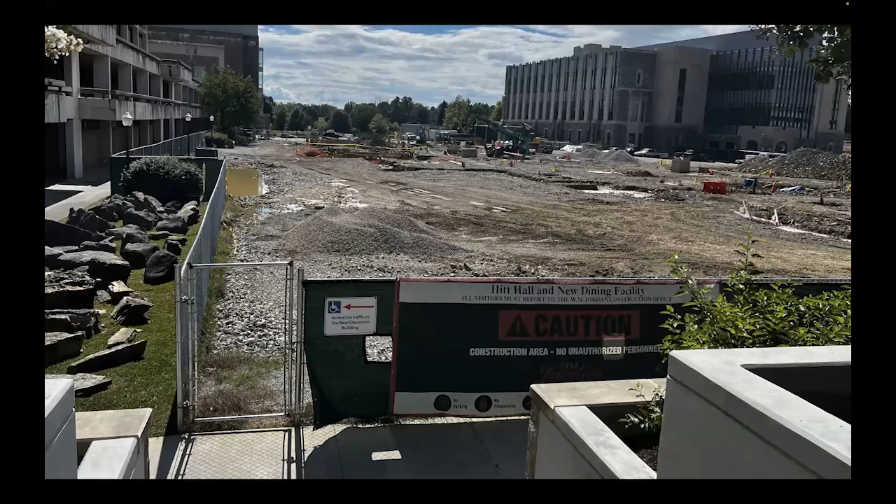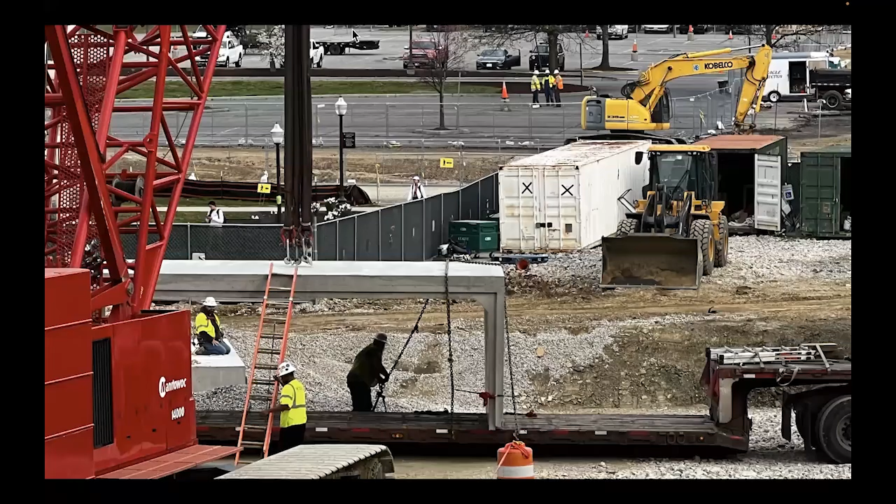This is the site down at ground level, and you just see a lot of gravel. And one thing that's going to come into play is there's a lot of gravel because it's super useful for all kinds of things we'll talk about, and it's also super cheap, especially where I live in the mountains where there's quarries everywhere. All right, and here's some more construction, and here's that box culvert. The one that's a football field long.

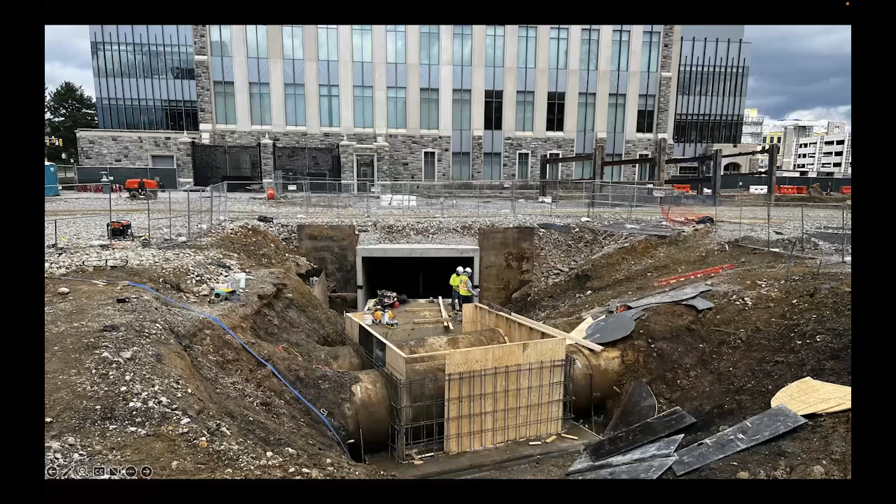And so they of course redirect the stream temporarily at first, and then they put the box culvert down, and then they redirect the stream back to where it wants to be, or where they intend it to be. I'm not quite sure which, and that's what it looks like. And here's what it looks like inside of it. And there's kind of one of the mouths of it. And again, you see it right here. And it kind of makes a right turn somewhere also. I'm not sure if that's at the beginning or the end. I think it's at the end.

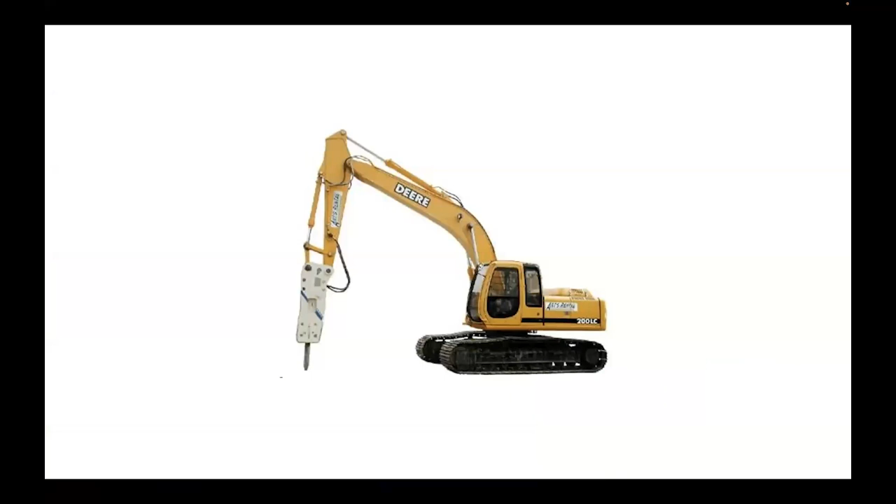Now, there are 3 things that come into play that make a foundation expensive, because the foundation is expensive. For a building of this size, the foundation is maybe 5 to 15% of the cost of the building. And it's an $85 million building. So let's round up to $100 million just to make the math easy, and because it'll probably go over budget.

So you have a $100 million budget, you have a foundation cost of something on the order of $5 million to $15 million. Well, that difference is huge. That's a huge line. The delta of that is overwhelming. And the thing about foundations is as long as you have a competent foundation that doesn't settle and can support the building properly, you don't get extra credit for having an extra good foundation.

It's not like cabinetry, or fixtures like faucets, where there's almost an infinite spectrum and yawning array of different faucets you could put on your sinks, where some are really expensive and those are better generally, or prettier at least, all the way down to your low-end sink. It's not like that with foundations. You don't really get extra credit for having a better foundation once it's good enough, because no one can see it anyway. So there's not generally a reason to have an extra good foundation.

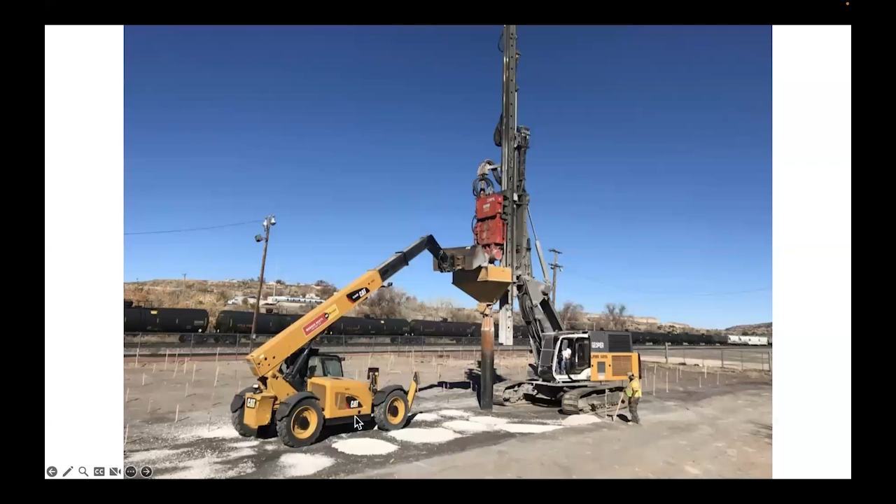What we're going to do is, in 250 different locations around this site, we're going to drill down and then fill it with gravel, which is super cheap, but we're not going to have to drill down that deep. And we're going to ram the gravel down, and it's going to kind of mushroom out at the bottom. If you can see my mouse, each one is going to have kind of a cone around it where the soil can't be disturbed. This is not this site, but that's one of the other things about this type of foundation.

It's hard to get a good picture of it because it actually doesn't usually look this clean at the top, because the gravel from this one kind of blends into the gravel from this one, and maybe blends into some of the gravel they put on top of a geotextile that allows for the equipment to drive in, which is for a different purpose altogether, so the site doesn't get too muddy for the equipment and the delivery trucks.

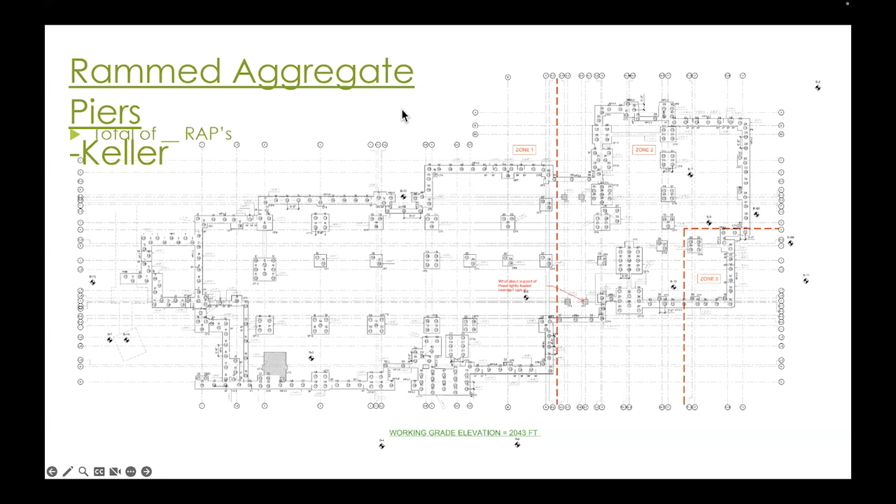But this is the idea that you're gonna drill down, you're gonna fill it with gravel. And then, as you're going to see soon, we're going to rest the building on top of it. So each one of these circles, like here and here and here and here, tell me on the chat if you can't see my cursor. Okay. So each one of these 250 circles is a pier, and I happen to have access to the specs of this.

Since specs are such a big part of so many of these exams, really probably all 6 exams, specs are in play. So let's take a minute and just read this portion of the specs. So this is locating the work. 1.4 verification. The surveyor shall verify that the following elements of the work have been furnished, installed in accordance with the contract documents. Piles and drilled piers. Verify locations, elevations, and dimensions. So that's a big one, right? You got to make sure it's in the right spot.

I saw a presentation long before it was completed on the Richard Meier church of the year 2000, the Jubilee Church in Rome. It was off by 3 degrees, which is a lot on a big site like that. So there was, I'm sure, a lot of hand wringing. I'm not quite sure what happened, but it all worked out for Richard.

Anyhow, submit certification to the owner with a copy to the architect in the form of original drawing signed by the surveyor. So that's a deliverable, a submittal that the contractor has to do, stating that the work has been accurately located relative to property line. And in general, chapter 0 and chapter 1 have all those kind of miscellaneous things like that. Like just make sure you surveyed it right, and make sure that your construction trailer has night lighting outside of it and has a railing, whatever.

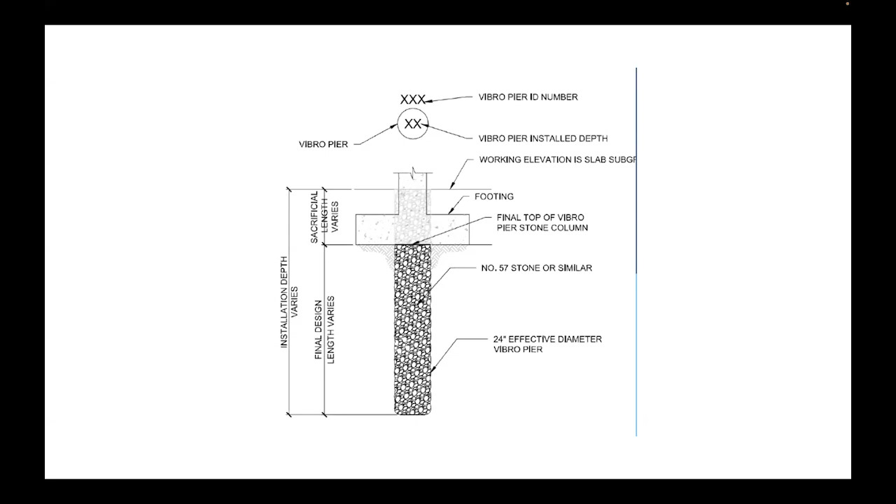And so here's one of the drawings of the footer of what it's going to look like. There's going to be a spread footing, which is going to bear on the pier. This is a rammed aggregate pier. Then on top of the spread footing there's a concrete foundation, either wall or column, that's then going to have a piece of steel on top of it.

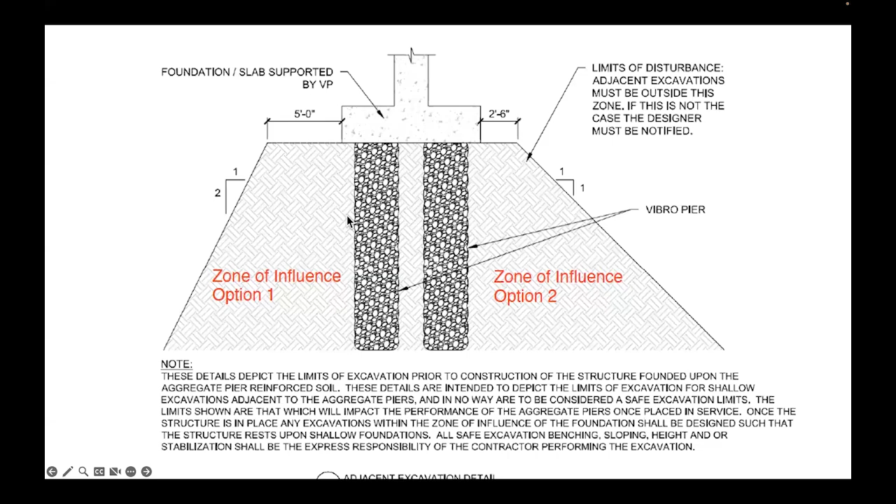And it's not always the case, but with these particular aggregates, it's often the case. These particular aggregates use some Portland cement as a little bit of a binder, so that things act a little bit more like an underground caisson, but just a little bit of binder to keep the whole thing together. And I think this is that underneath here. In fact, I'm almost certain it is.

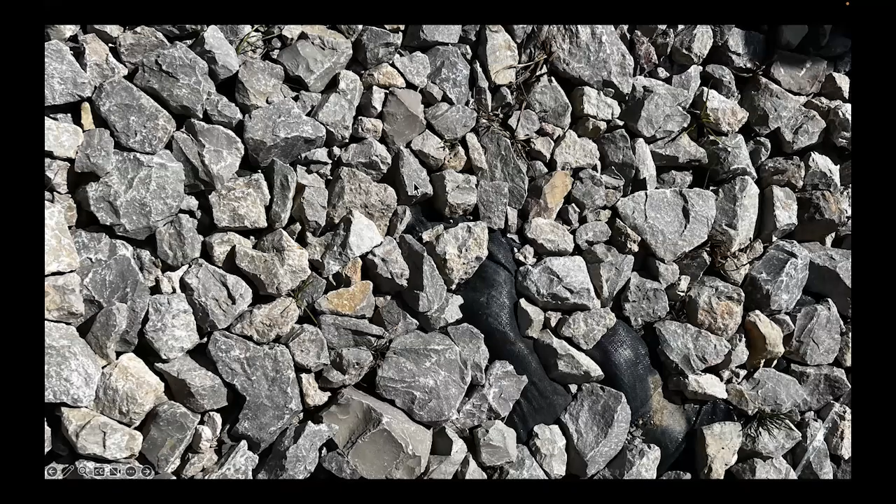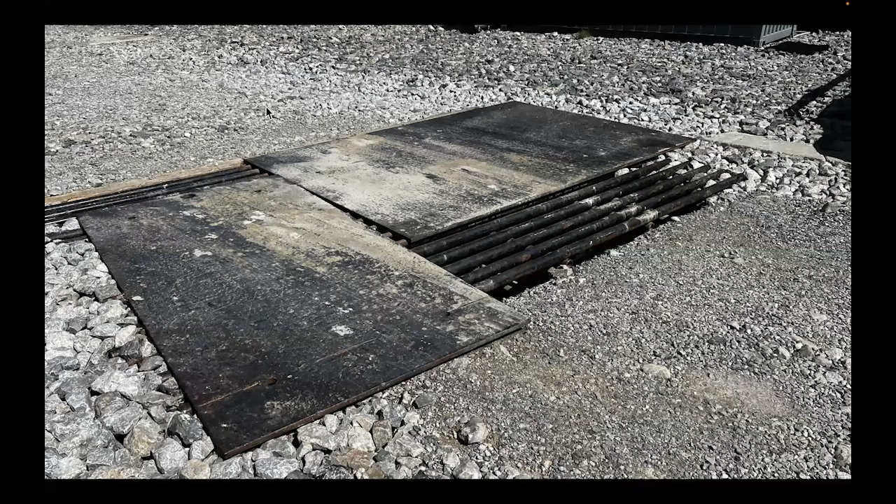And so gravel, as I mentioned, especially where I live in the mountains, they literally just take it from the quarry right next door kind of thing. And they'll just put it down. And you can see underneath of it, right here, there's a geotextile. And so they'll put that, in this case, this is gravel that they're putting because they have to bring trucks continually.

I mean, if you ever see a construction site this big, and this one's not the biggest by any means, but if you see a construction site on a $100 million project, you will see a lot of construction trucks coming all the time. And so they have ways of doing all kinds of things. One is making it so that these big construction delivery trucks and cranes don't get stuck in the mud. So they just put gravel down.

Now, I'll share with you there was another construction site we used to visit the year before this one. I take my students at Virginia Tech to visit these every month, and the one before was where they were always putting more gravel down, like every month. It was always a mess. And this one, they didn't really seem to have to, even though this one was at least as wet as the other one, because there's an underground box culvert in both cases. They both were actually the same part of the same underground stream, even though they're about 3/4 of a mile from one another.

And now that I think about it, I asked them what they did differently on this one where they didn't need that. And they put the geotextile much wider than the area that they wanted to drive on. And they think that's what actually helped a lot, because it was the same construction company in both cases.

Anyhow, go ahead and put in the chat what you think these grates do, these steel bars over a pit. See if you know what those do. Yeah, you got it right, Junior. They clean tires. So if there is mud on the tires, some of the mud can be taken off either naturally or maybe they hose it off. I'm not sure. It's almost like a welcome mat, but it's more for leaving. They don't want the mud leaving because it makes the roads messy, and campuses like the roads to be clean. And also because we all like our topsoil to stay where it belongs. And no one wants their truck to be messy.

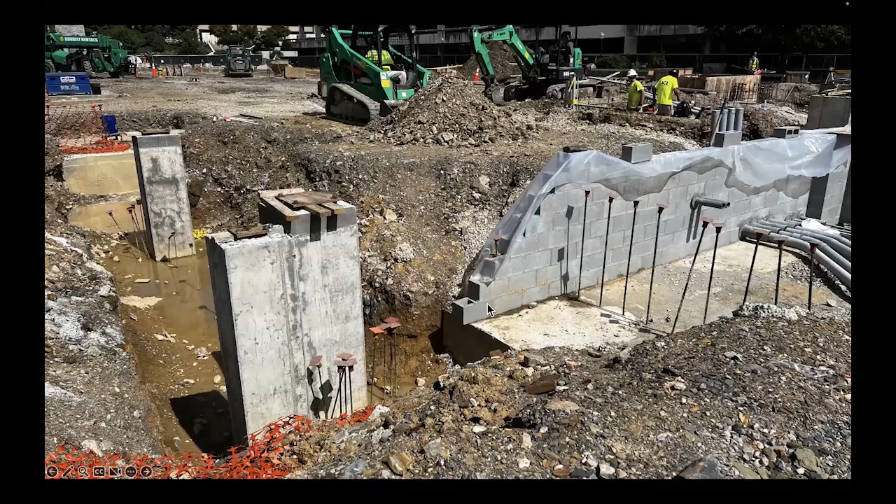So in this case, you see the footer, and then there's a block wall being built on top of it. Over here, there are columns that are resting on a footer that are again on top of the aggregate piers. Now, why can't we just put the steel on top of the aggregate piers? Think about that for a second. There's two reasons we can't. One is, how would we attach it? It's just a bunch of gravel, so how would you attach it in a permanent way? And secondly, we don't put steel underground. Generally, concrete and gravel can be underground, but this is a steel structured building.

So from bottom to top, it goes rammed aggregate, and then on top of that is the concrete columns or stem walls, and on top of that is the steel structure. Again, you see more of these coming out, and start to pay attention to these. Those are plywood right now that are putting the leveling bolts in the right places. You see it here and here, and you see this line connecting them. So they're making sure everything is at the right height because they're going to be bringing the steel in not too long.

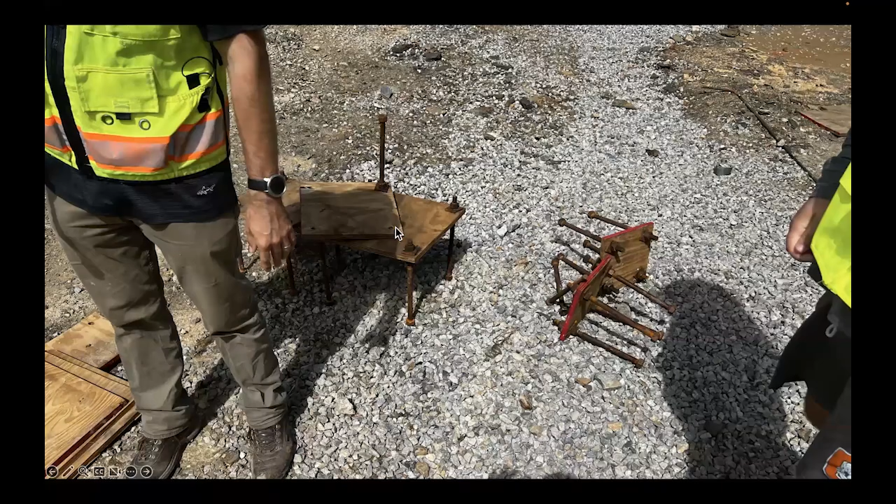That's what these look like. So if you ever wondered how they get the bolts, the threaded rod with the nuts, at the right place, this is how they do it. They put either a J bolt down below, which looks like a J, so it can grip onto the concrete in the concrete column that's coming out of the ground on top of the footer. In this case, they just have a threaded rod with a bolt down here at the bottom and a bolt up here at the top.

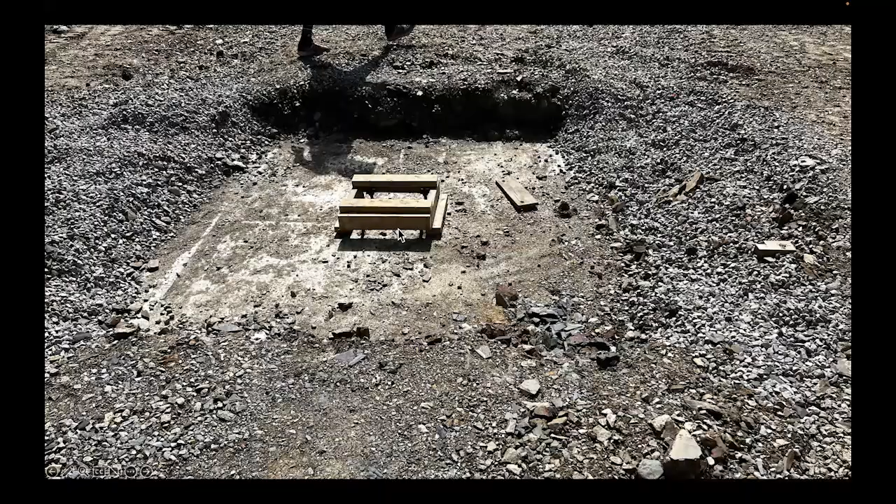And again, they have this piece of plywood that's there temporarily just to kind of hold it in place. And then when they're pouring the concrete for the column, they'll cast it into the concrete element. And usually there'll be something like 2 inches. What they'll do is they'll pick one of the bolts and make it exactly at the right height. You saw them with the surveyor and the level string, making sure that was going to happen correctly and everything

was plumb and aligned. And then later when they put the steel on, they'll use those 4 bolts and they'll tighten them. They'll turn it a quarter turn or a half a turn or 2 turns clockwise or counterclockwise because they want to get the steel plumb. They want to have it vertical. And of course, concrete is not that perfect that you can have 3 stories of steel exactly vertical just by casting it in. We need to be able to use these bolts to account for tolerances and fudging a little bit once you're on the site.

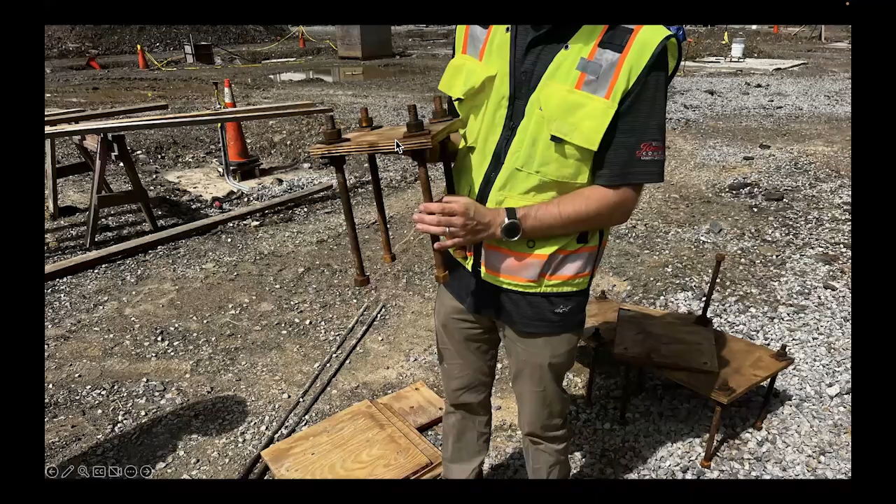But for some reason, we're always surprised by how long the foundation takes and how long the finishes take. And we're always surprised, even as architects. I understand why lay people would be, but as architects, we're like, man, what is taking that building so long to get out of the ground? And then we're like, man, that building came up so quick when you see the superstructure, whether it be wood or steel. And then we're like, man, that building's taken forever to finish. But it happens every time, and it seems to get us every time.

And that'll cover it up, make sure nothing gets in there later, and make sure things don't rust. So it'll cover up the bolts in that space between the concrete foundation columns and the base plate of the steel columns that go on top of them. So there's going to be all the steel in the end, and actually there winds up being a lot more steel, as I mentioned.

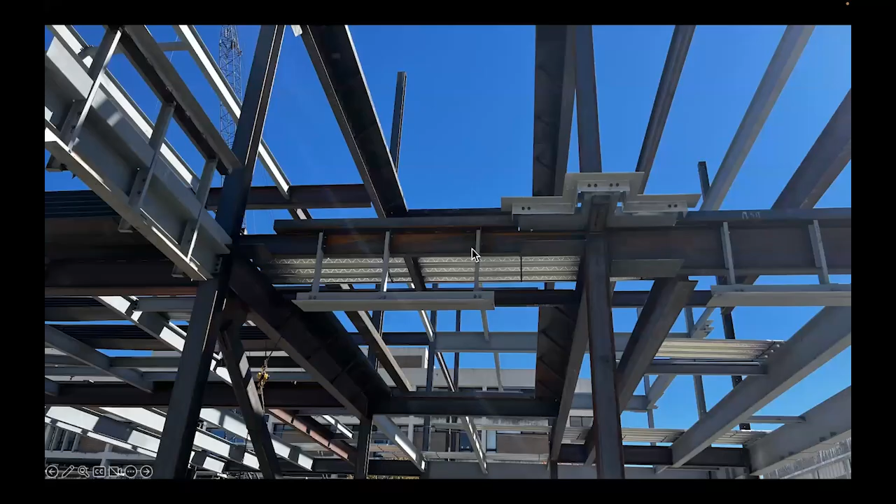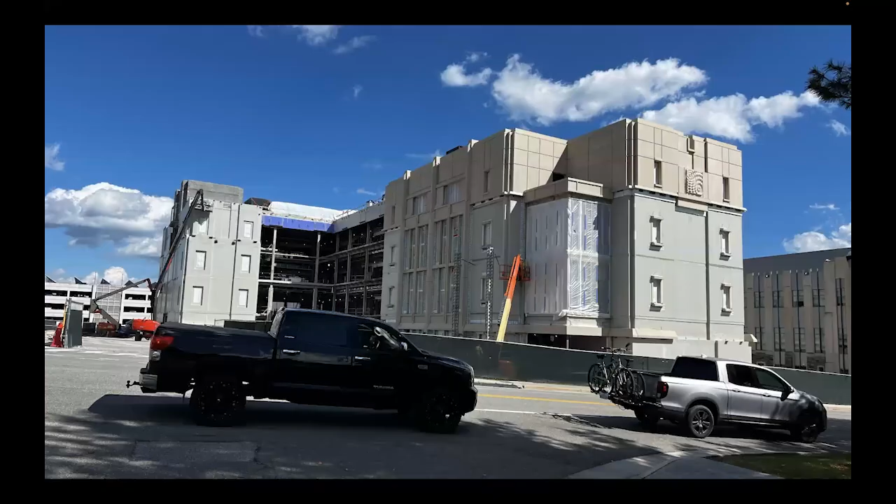And you see all the waterproofing on top of it. You see the precast concrete that's attached to those steel elements. And the whole thing is really just attached to the steel. So there's going to be stone outboard of that. But even though the stone looks like it's going to the ground and being supported by the ground, in reality, at least a huge portion of the stone after a certain height is being supported by these columns that are on top of these rammed aggregate piers. And again, you see it here and here.

And so this is kind of a section detail. And it looks like there's precast concrete coming down. You see the air drainage gap, the air plane for the cavity wall. You see the exterior insulation. And somewhere back here is the steel column that's actually holding all this stuff up.

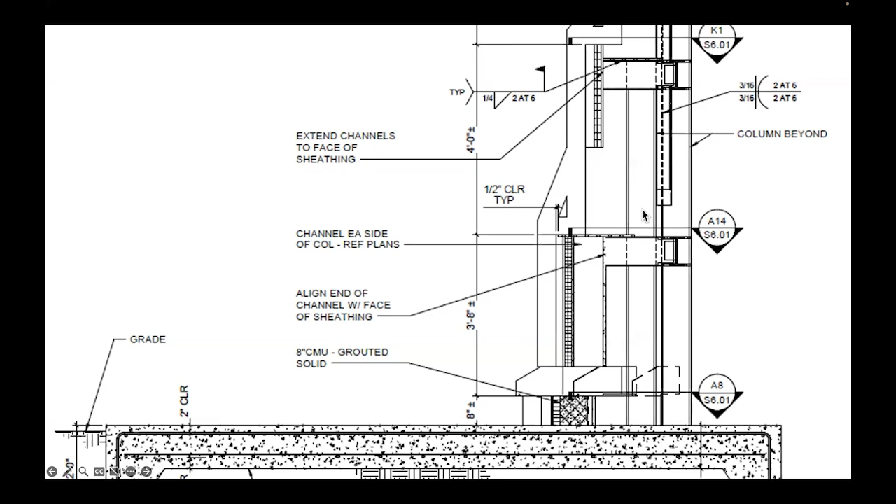The conduit that's coming in, as I mentioned, has to not only avoid the zone, the cone of shame around the rammed aggregate piers, but also, and I bring it up because this is very much in play for a lot of the exams: the owner is the university, the contractor is the general contractor. The owner has his own consultant doing AV. So all the audiovisual cabling and stuff is being done by the owner's own consultant.

I guess the thought is that the owner wants some kind of consistency in its AV systems, so that it can know what's there, it can keep track of it, it can make it upgradable as it needs to. It would be a shame if every classroom had a completely different system, where the technicians would have to watch YouTube videos to figure out how to connect one piece of AV equipment to another. So the owner has their own

subcontractor. Now, when that happens, and it's not uncommon, especially in specialty situations like AV on a $1.5 billion a year campus like this, it's not unusual for the owner to have some of their own subcontractors that they prefer to deal with. And those subcontractors are paid for by the owner, but they're coordinated by the general contractor.

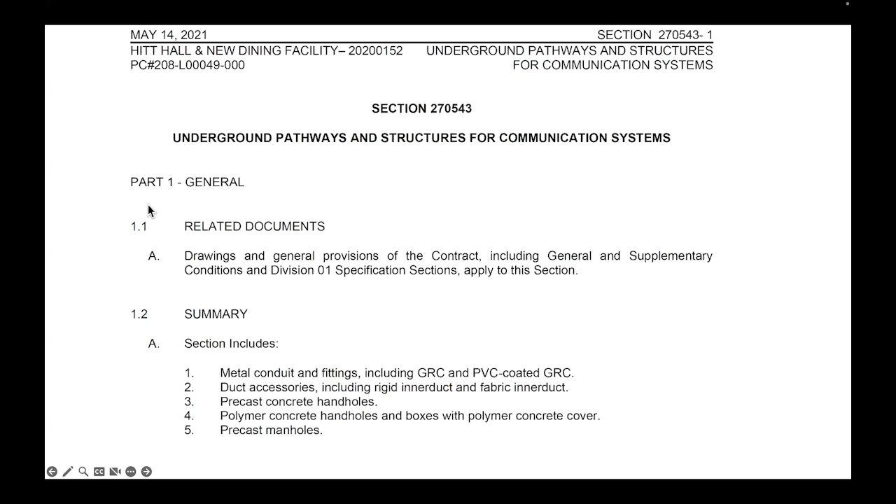So this is the underground pathways and structures for communication. So this is the AV. Section includes metal conduit and fittings. So there's kind of a summary of what the section includes, precast manholes and so forth. There are definitions for what some of these things are. So somewhere else it talks about GRC, and now you can see what that means: galvanized rigid conduit.

And of course, with MasterSpec, they're always in the same place because you want the AV consultant that the university hires not to have to look through all 2,000 pages of the spec document. You want that particular group of people who are doing the AV to know that they are going to section 27053, 270543, because that's where it is.

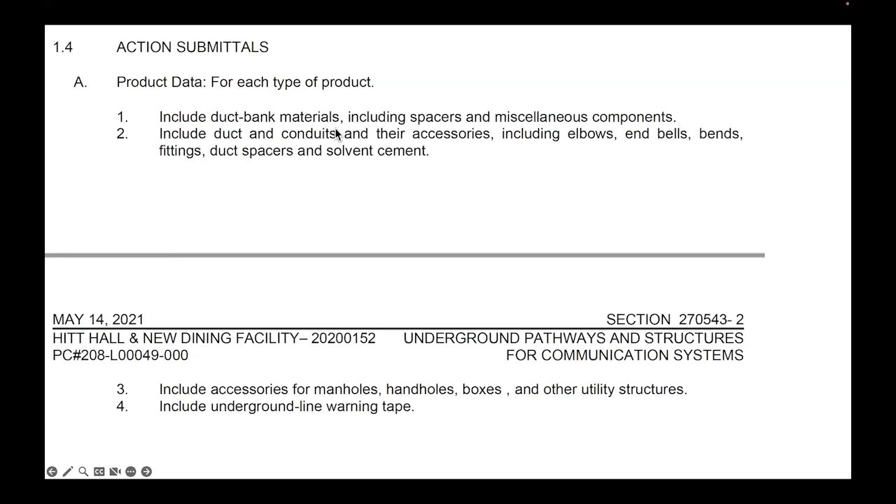But anyhow, include duct bank materials, including spacers, just has kind of all the rules, precast or factory fabricated, fabric, so forth, include duct entry provisions.

Some of you guys deal with specs all the time. This is not very interesting to you. Some of the younger people who are in this group probably don't deal with specs as much. Actually, some of the older managerial types might not either. It's kind of a mid-career type thing.

But anyhow, metal conduits and fittings, and here's that GRC that I talked about. And then there'll be performance-based specs. So listed and labeled as defined in NFPA 70, comply with TIA 569-C. So these are different kinds of things that will have the general requirements for the metal conduit.

So, I'm making this up, but it'll say, underground ones shall have a rust-proof coating that meets a standard of whatever grams of nickel per linear foot of pipe or whatever. Or it'll say it shall have no more friction than whatever, or it'll say that steel pipe shall be no less than a quarter-inch thickness in the shell of the pipe itself.

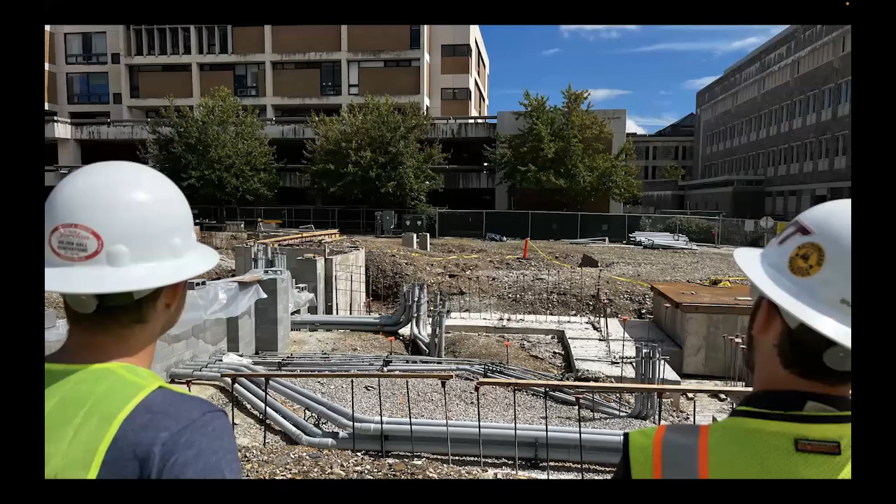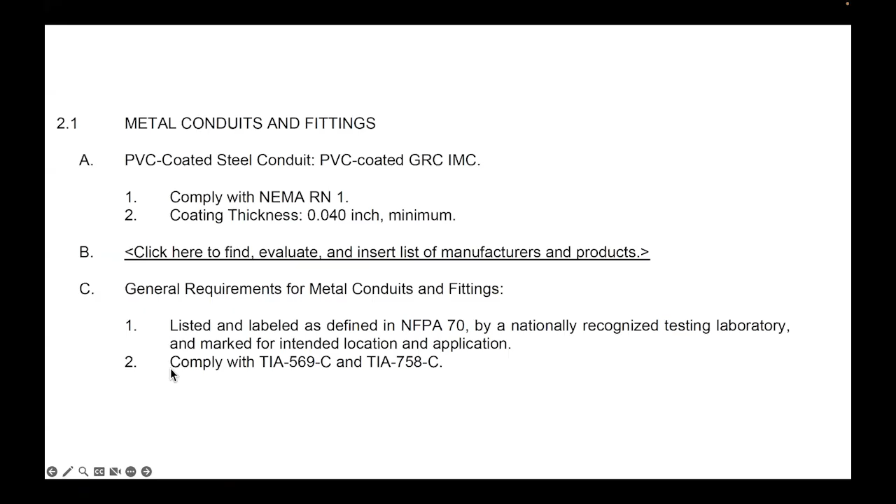But anyhow, those things are going to have to go into the building. This particular building, they went in a bit sloppier than some others I've seen. And actually, a little bit later, we came back to visit, and they were waterproofing around these, which is difficult to do, as you might imagine, because this is a great place for water to leak in as they penetrate the foundation. Anyhow, there's more of this and more of this.

So going back to the original question where we're asking about foundations and how this works. So we have spread footings, which maybe can handle it in this example. It depends on the soil, the width, a whole bunch of things. So there's no such thing as incompetent soil. There's incompetent soil relative to the weight of the building. If you're putting a shed on it, the soil might be perfectly competent. But if you're putting a bigger building on that same soil, it may not be sufficiently strong.

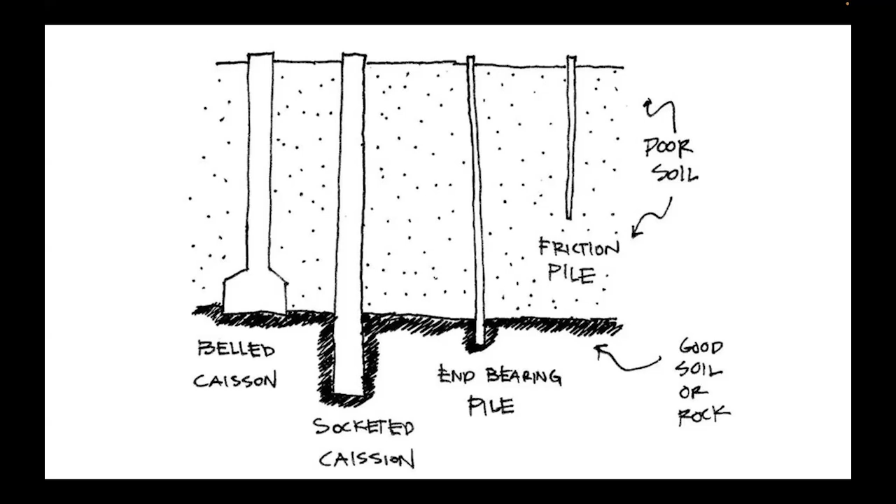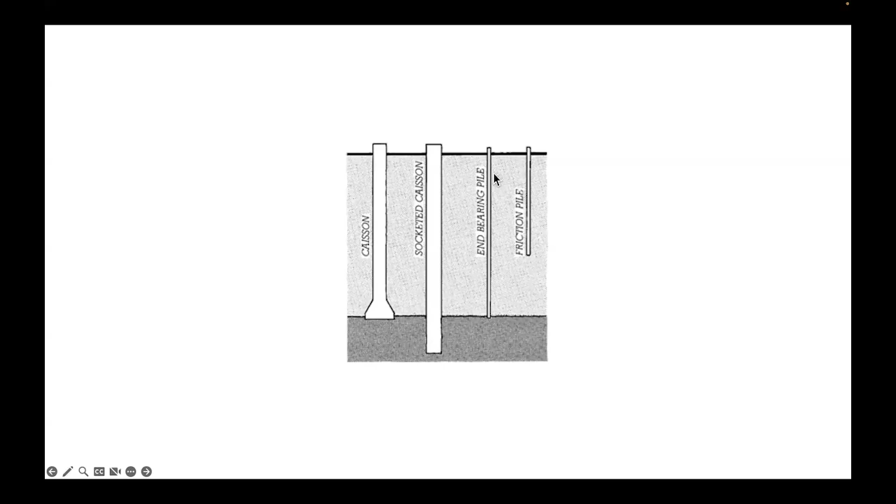And generally, that's the same principle as if you stuck a straw in the sand. There's enough friction that it can hold some weight. And if you stuck a shovel in the sand or something like that, it could hold some more, and so forth. This is from Fundamentals of Building Construction, I think. But anyhow, it's the belled caisson, the socketed caisson, the end-bearing pile, and the friction pile.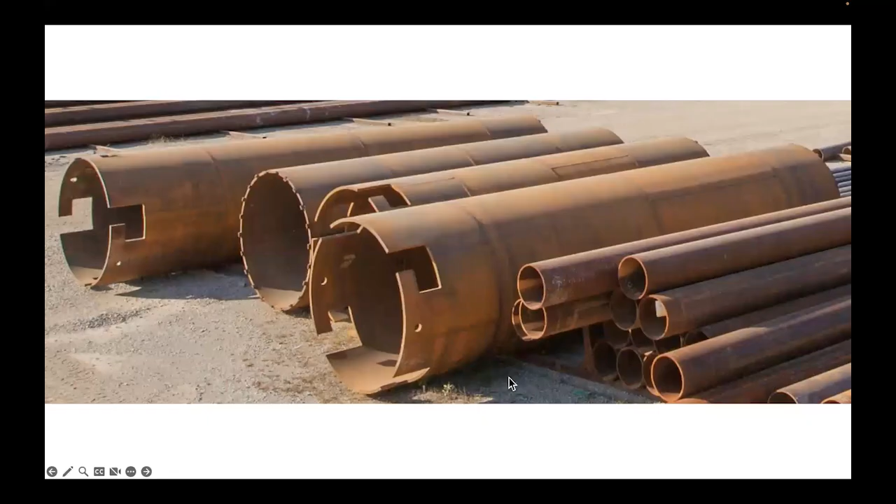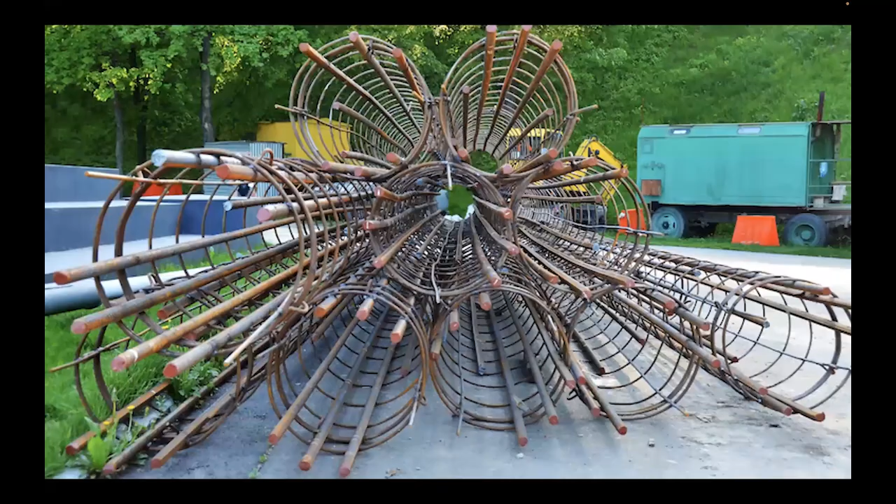And so here's what the caissons look like. They have these big kind of things that they drill down in, and they'll start drilling in. These are the bits, and they kind of attach one to the other. I don't think they leave the metal in. I'm pretty sure they take it out and reuse it and fill it with concrete. You can tell me on the chat if I'm wrong about that, but I'm pretty sure they take the metal back out. And then, of course, there's all the rebar and all the manpower that it takes to weld the rebar and put in the rebar.

Now, piers, one of your choices was piers. Piers is a little bit fuzzy in this case. What's a pier? Technically caissons are a type of pier, underground pier, foundation pier. So having the choice caisson and having the choice pier should kind of give it away that it's neither of them, because you can't have a pier and a caisson, because a caisson is a pier and a pier is a caisson.

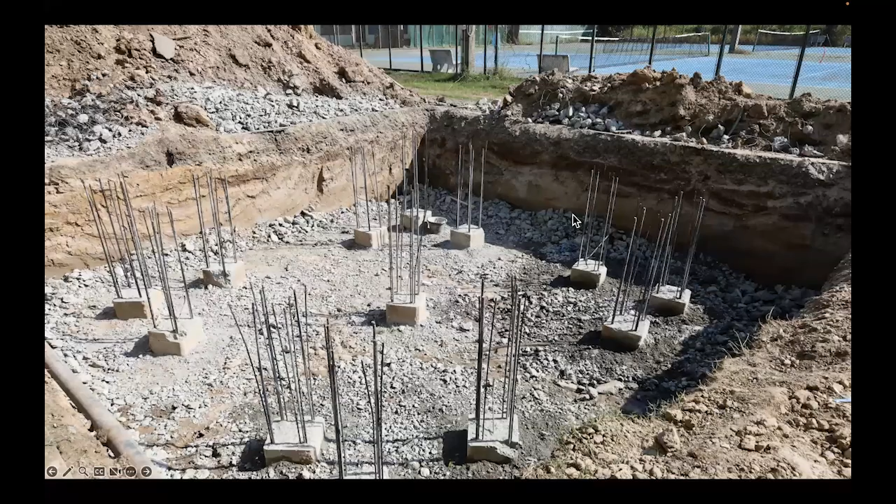There's another type of, especially for houses, another type of pier foundation called pier and beam, which is just what it sounds like. So there are these kind of sonotubes that'll go into the ground, and then we'll put beams on top of them, especially if we have a crawl space or a deck or something like that. But sometimes these are also just called piers, when you have poured-in-place concrete elements that go underground.

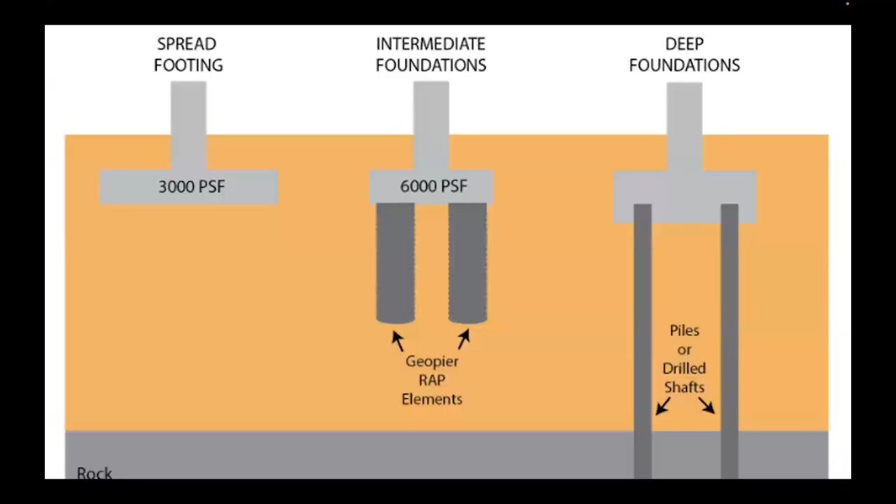All right. That concludes this. Actually, let me go back and read the question again, because I think it's probably worth doing that. I thought I had the question again in a later place, but I guess I did not have it.

It's like the last 40 minutes of your life being revisited. So here we're saying a suburban track club. I made it suburban just because I made it clear that there's probably no other buildings around it. And I made that more clear when I said there's access for equipment on all four sides. If there was no room around it, maybe it would be harder to do rammed aggregate piers, because if you have one building right against another, then you don't have that cone of undisturbed soil to spread the weight over. But anyhow, that's not the case here.

It's hired an architect to design an indoor track field house, a medium/big-sized building. The owner's priorities are cost and aesthetics. Cost is often the case with an owner. And that's where the rammed aggregate piers come in, because they're cheaper. That's really the only reason we're choosing them, because it's not like they're better or worse. They just all do a good enough job, and you don't get any extra points for supporting a building that's heavier than the building you're building. Anyhow, and aesthetics, both interior and exterior.

So maybe in this case, we save $10 million by using rammed aggregate piers that we could spend on the interior and exterior of the building. You can get a lot of pretty good finishes for $10 million, even on a big building. The site has access for equipment on all four sides. And from a technical standpoint, caissons, piers, or rammed aggregate piers are each feasible. Now, again, piers are spelled wrong, but also piers are kind of a vague thing. Select the best option for the building's foundation. So that's why the best option is rammed aggregate.